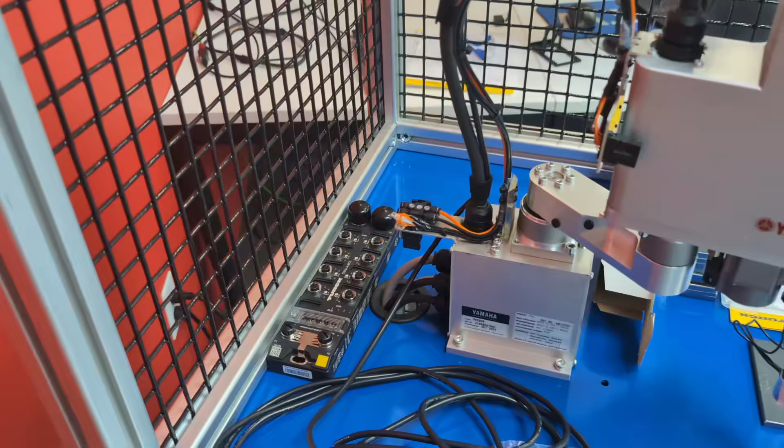So now I got to figure out how I'm going to get this mounted into the trainer so that people can see it, but it also doesn't constrain the operation of it, and hopefully the robot doesn't smash it. Looks like it'll just squeeze behind the hole that we use to run the cables down, which will be very convenient.

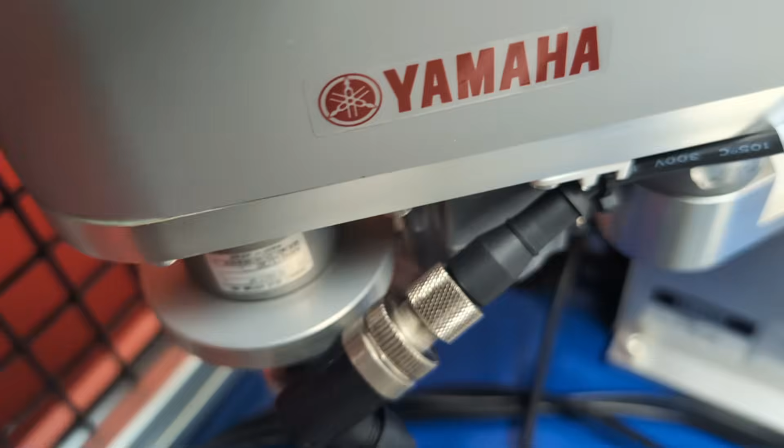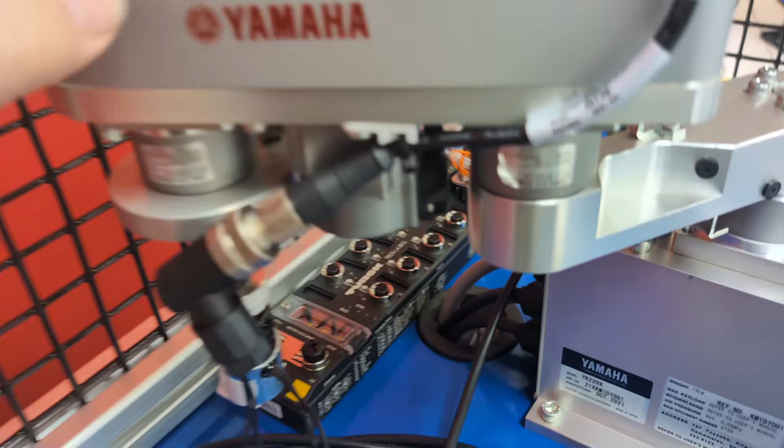And the robot, let's see, we're really close. Okay, I hit the hard stop there, so we could come around and hit that. In the end, I'm going to need to either make a soft limit or add a hard stop to the robot so it can only go there. Then if we come around the other way, knocking all my things out of the way, I had the same issue - it stops there.

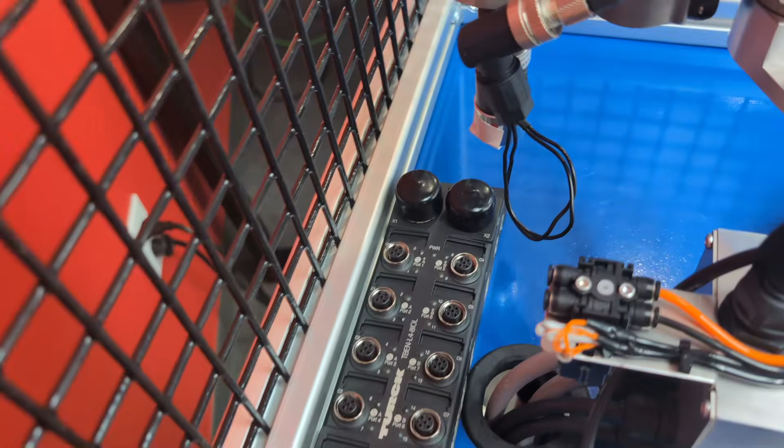Arguably could run into this one port right here, but this looks like the spot to put this, and this will let them see it and it'll be out of the way. Of course, there's always an obstacle to run through.

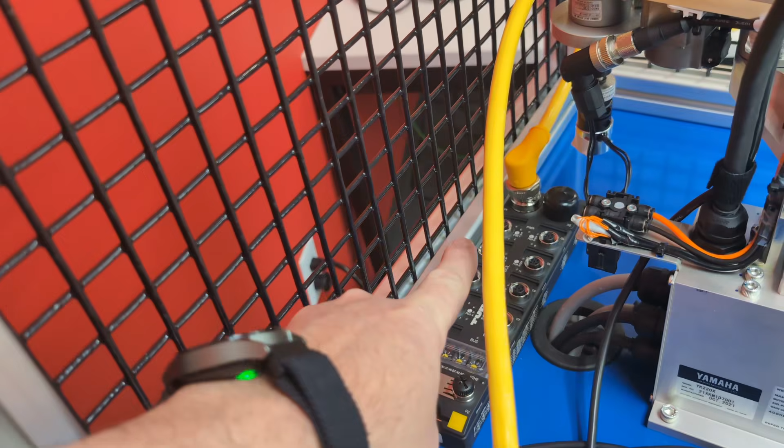A 90-degree connector is going to put my cable heading the wrong way because I need to end up here. So I don't know if I'll just loop around and drop in, or this may be a time for a connector that you put on the end of a cable, because those you could index.

If I get that cable running right through here, that'd be really good. Of course, that's going to get in the way of everything else. Always fun, always tough to figure out what order to do them in.

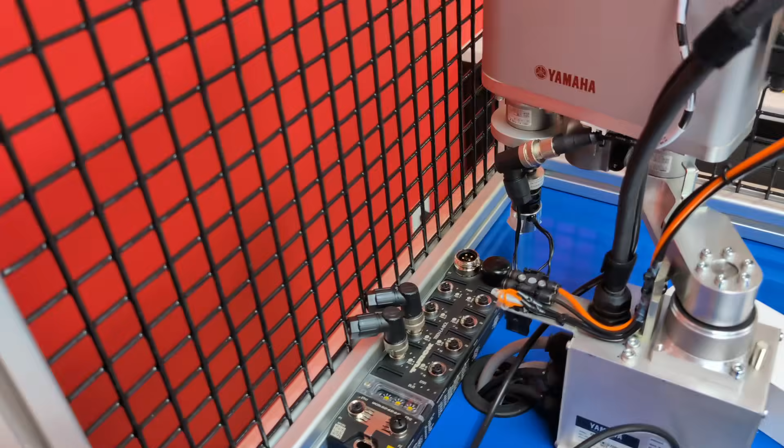I think I'm going to go this way with these. I'm going to try to leave these open for various accessories that someone may want to add. But from a cable layout, I'm mainly looking at these three right here. 1, 2, 3.

I think it looks nice. 1, 2, and we'll have a third one. Of course, that does put it on port 4, 3, and 2, which I know some of y'all are going to cringe at because you're going to think I need to start at 1, but no, it looks nicer.

First, in typical fashion, I need about a 2 meter Ethernet cable with the M12, and I have a 1 meter and a 10 meter.

First, just realizing these have the auxiliary outputs on them. Doesn't really make sense to tie up my inputs with them, so they really should go over here. So here you go, we're gonna move the cables around for another 20 minutes.

Of course, now I'm realizing if I put these over here, I can't get to these. Oh, wait a second, what if I just turn the whole block around? Yep, about 20 minutes later, to end up in the exact same situation.

But mainly now the ones with auxiliary outputs are kind of here where we can use them easier. These right here are definitely just inputs because they're going to these lights over here. So now we got to do some mapping.

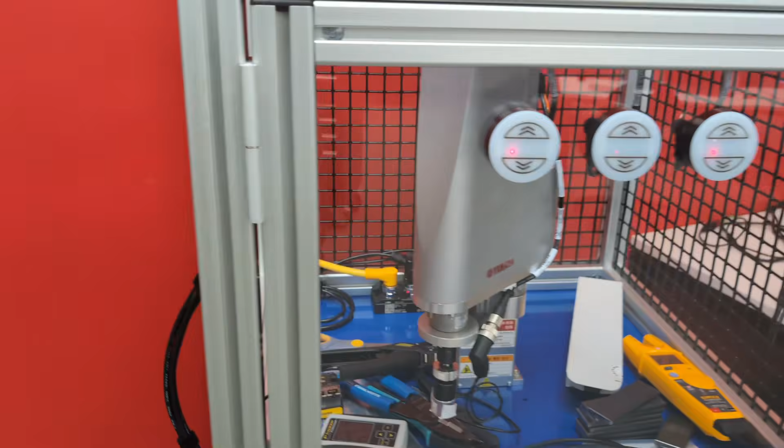You gotta love my expensive workbench. And this is where I really love this Turck module.

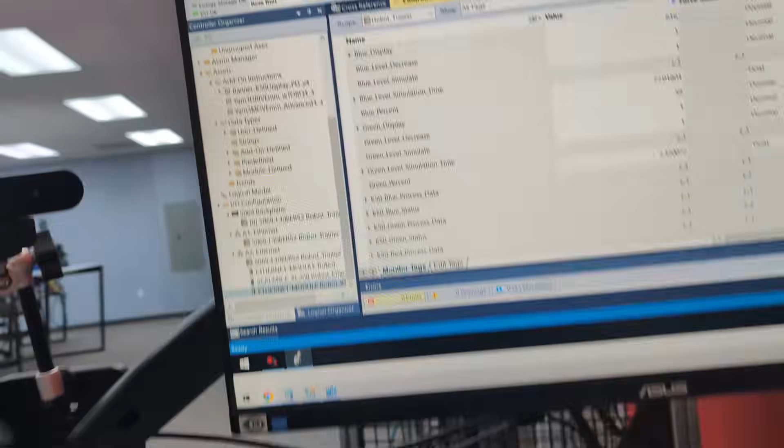As we go over here to documentation, first of all, we pulled out one of these FEN20s, stuck it back in, assigned the right IP address. This thing's ready to go. It uses the exact same configuration.

And I know I was using port 1, 2, 3, and 4 because this is only 4 ports. So if I go over here, we can get a documentation up here, and then we go to Ethernet IP map. And yeah, now we need to go figure out what we need to do.

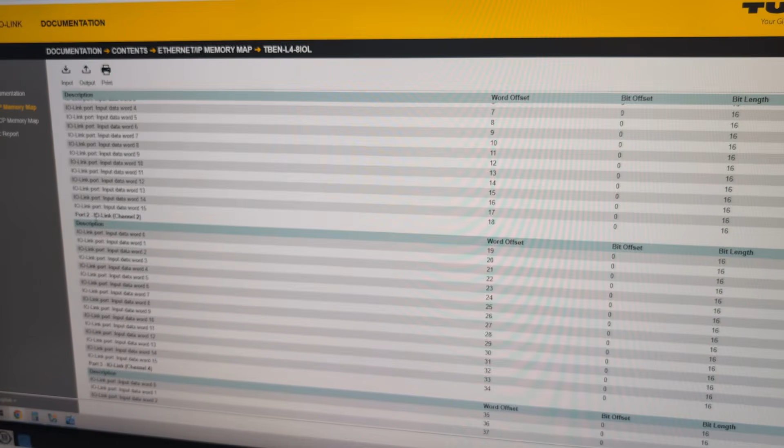So now I have what was port 1 outputs on port 8. So we'll scroll like crazy down to our output section.

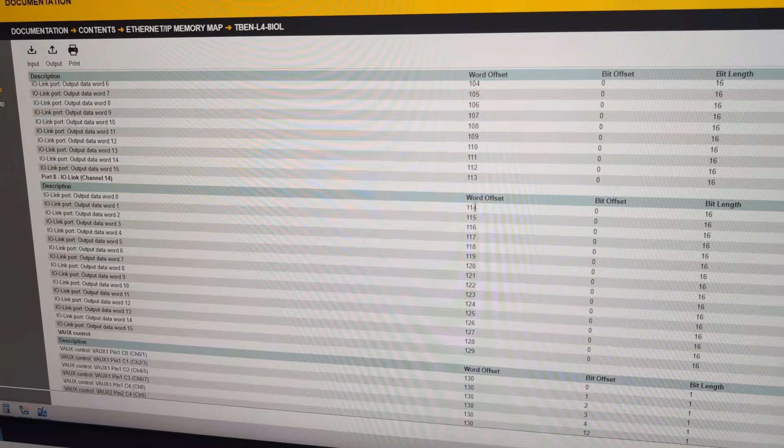So yeah, we were on word offset 2 for our outputs. And now we're going to be on word offset 114, and that should magically make that red light work.

And so now I'm going to right click that IO link module. We're going to cross-reference it.

First, you know, there's just something a lot of people don't know, because if you've ever been to a class, you know I don't like you scrolling a lot. It looks like there's nothing here, but we can hit that by tag.

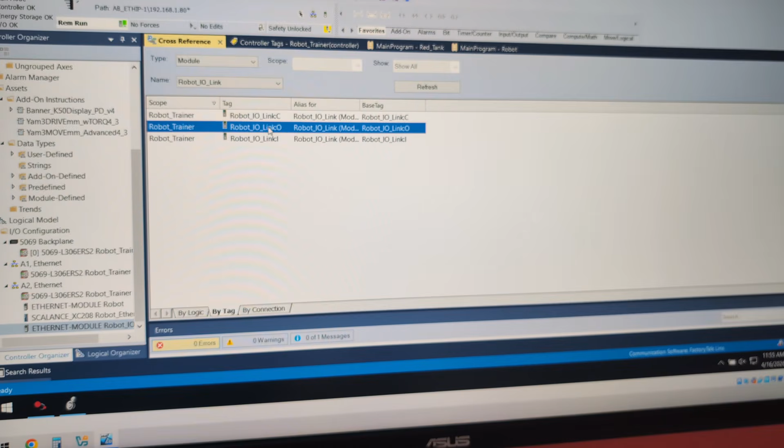And there's my outputs. And we're just going to go ahead and cross-reference this whole thing.

And, well, it's the red tank, I know that. Okay, and there's my 2.

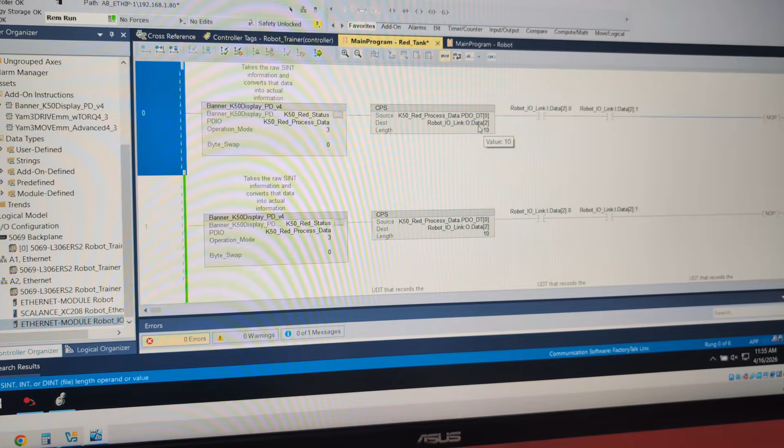So we'll start our rung edit here. We're going to change that 2 to a 114. Oops. Took out my little bracket thingamajigger.

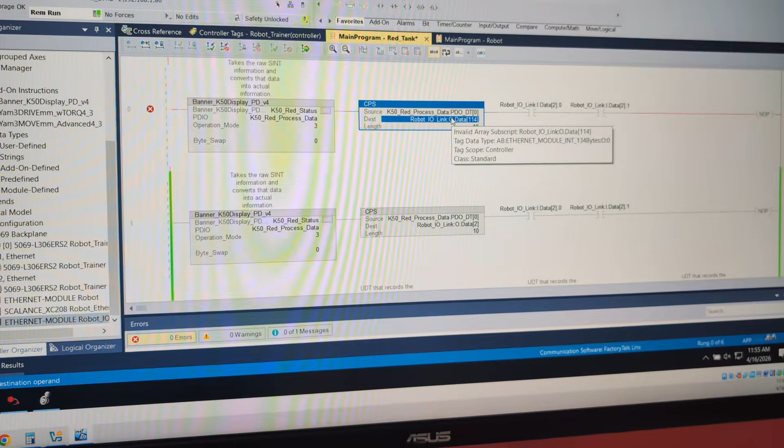Now, whoa, why don't we have happiness? Well, folks, we have a learning opportunity apparently. And of course the answer's right in front of my face.

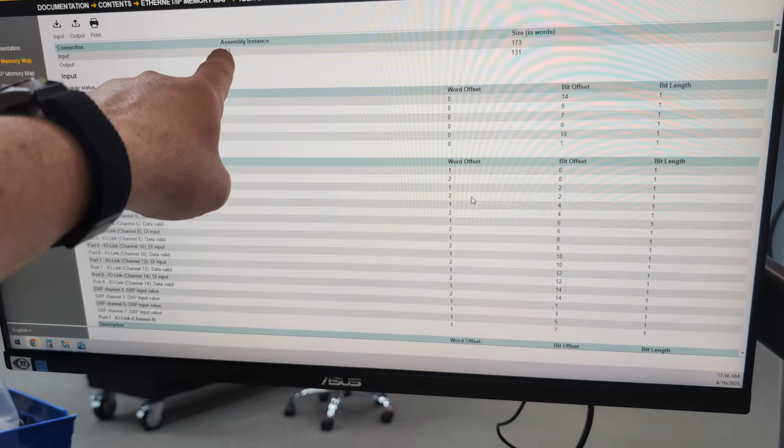I sat there and said the setup's the same, mainly the assembly instances are the same. But if you're using the 8-port module, our inputs need to be 173 and our outputs need to be 131. I don't have number 114 over here.

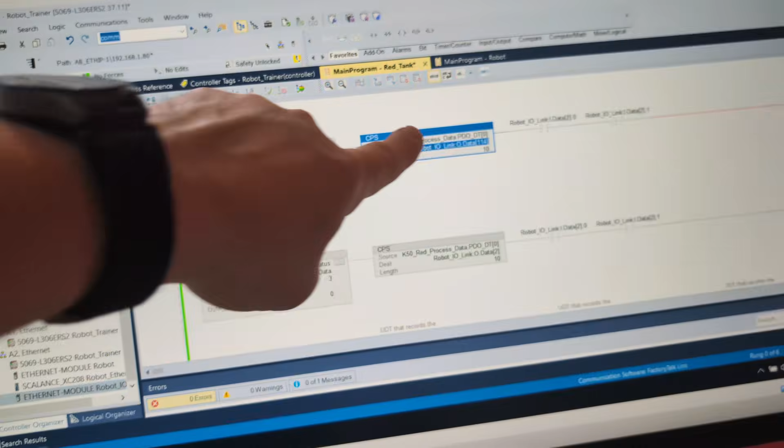So if I go over to the properties of the IO link module, yep, I'm too small over here. And of course I'm going to have to download to fix that. So we'll go ahead and save, because good grief, I did this earlier this week and forgot to save it and lost all my robot parameters.

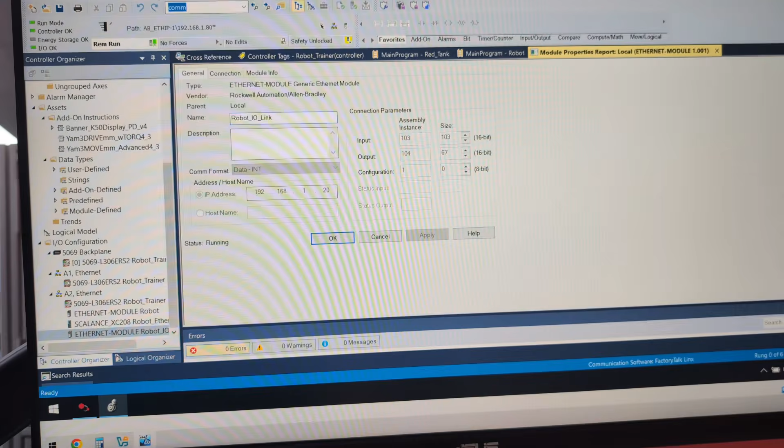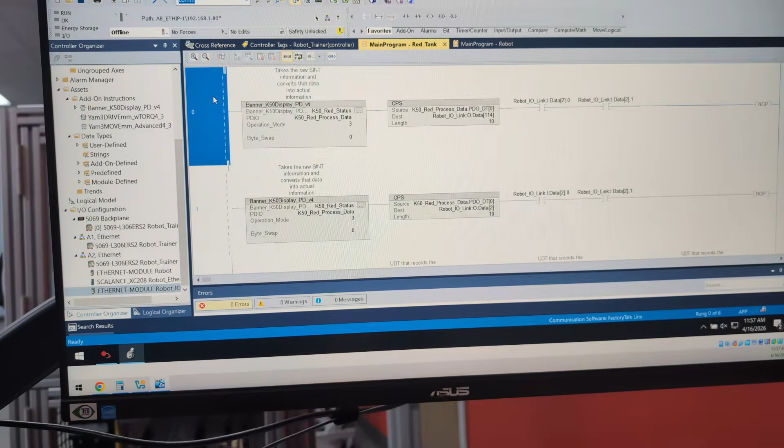Then we'll go to communications, go offline, and change that 103 size to 173. And we're going to change this 67 size to 131. We'll go ahead and press the OK key. It's going to make that happy. Very awesome. Can I go? Oh, well, I can accept that here and that'll be fine.

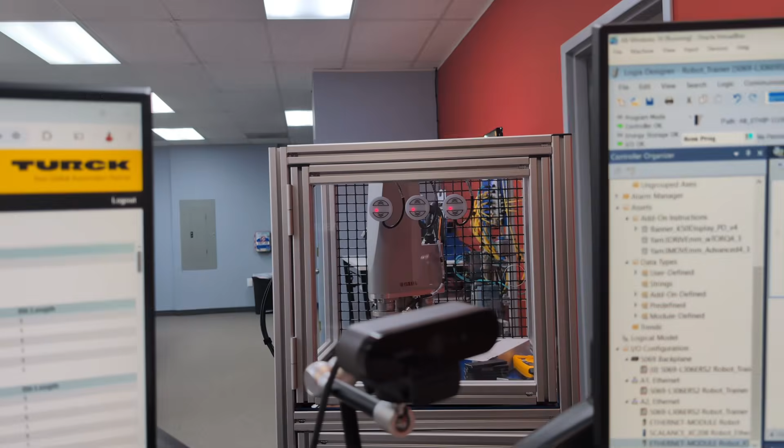Yeah, as soon as I download this, hopefully that'll fix my red light. So make sure it's my PLC, hit the download button. Then hopefully the moment I put this in run mode, that left-hand light starts working.

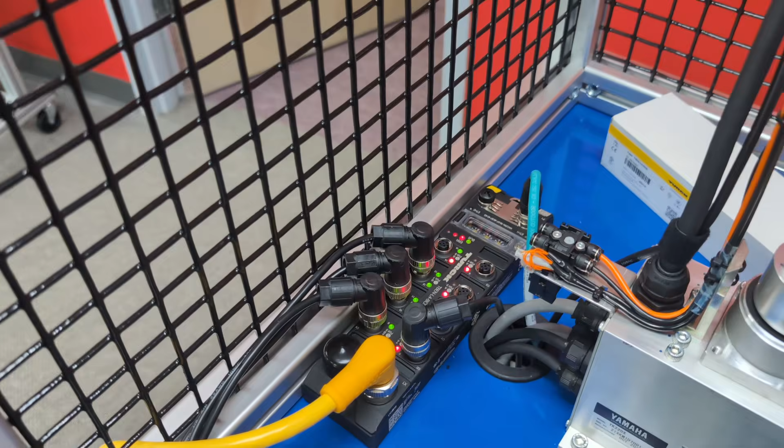Oh, don't you hate it when it doesn't work? Well, let's go figure out why. Yeah, that's because my counting abilities are not that great apparently today.

There's port 8, it has nothing connected to it. That would 100% explain why it's not working. The red one's port 5. Red, green, blue. So we need to go down and find where port 5 begins.

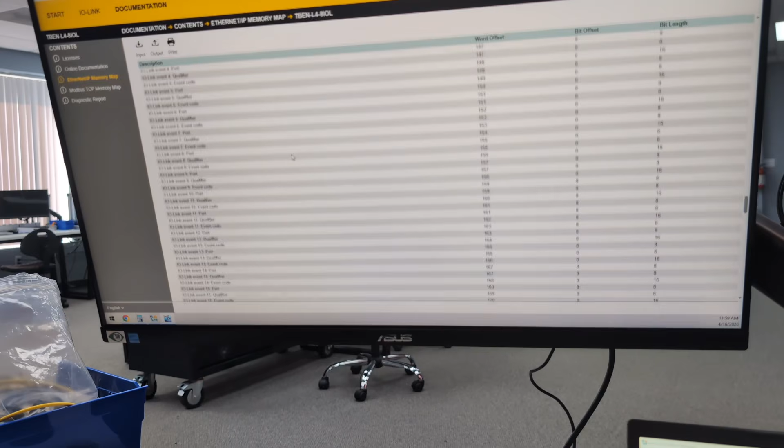Oops, that's the inputs. We want to go down to the outputs. They may be the same on this module, I'm not sure. But they made them down here in their own little area, so we're going to give them some attention. And port 5 begins at 66, not 114.

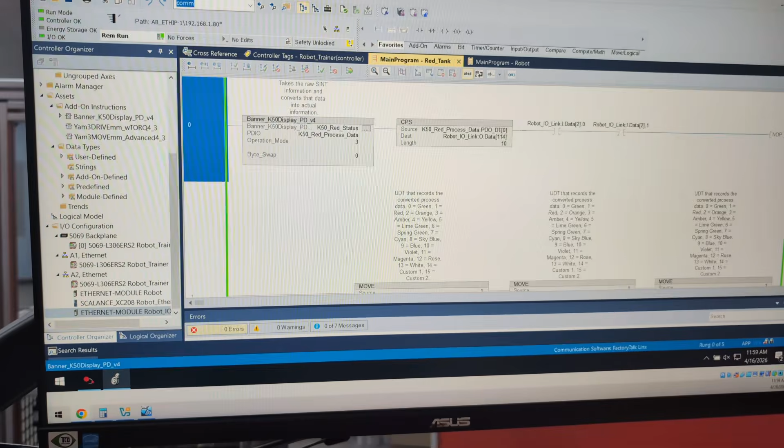So then we'll go over here. We'll start a rung edit. We're going to change you to 66. Oops, you need to change to also. Yes, you do. That's the input side of this.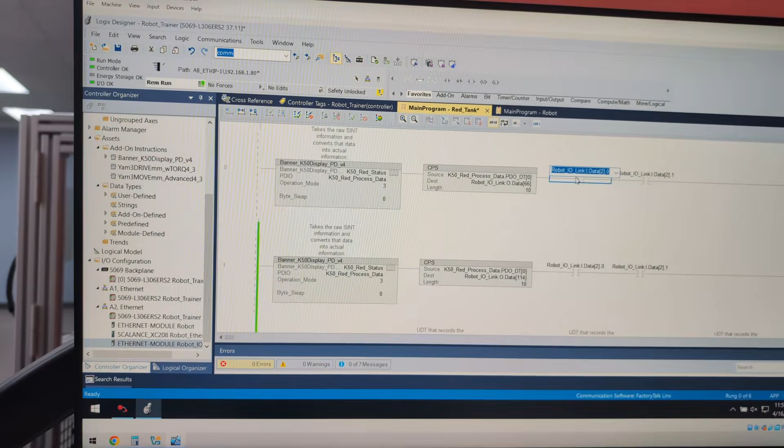Well, while we're here, we ought to do it, because if you didn't know it—yeah, when I get up I'll point it out better—these are really cool lights from Banner. They give us a display, a light color, and they also have up and down arrows.

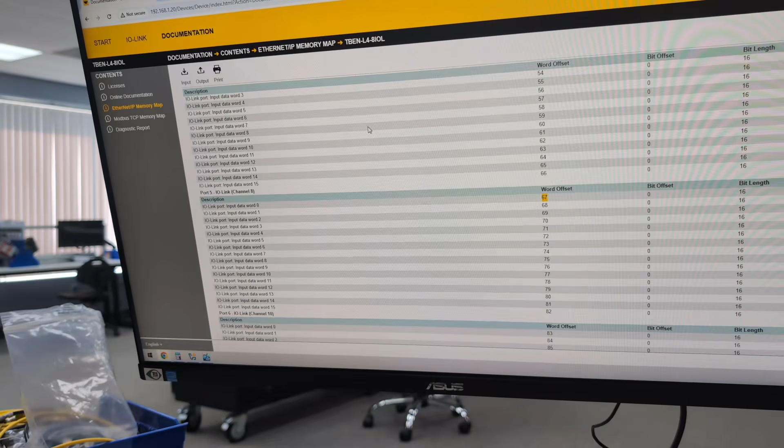So let's see what port 5 inputs are. Port 5 inputs, ooh, it started at 67. I wonder if the other one did the same way. Well, I'm gonna guess it's 67 instead.

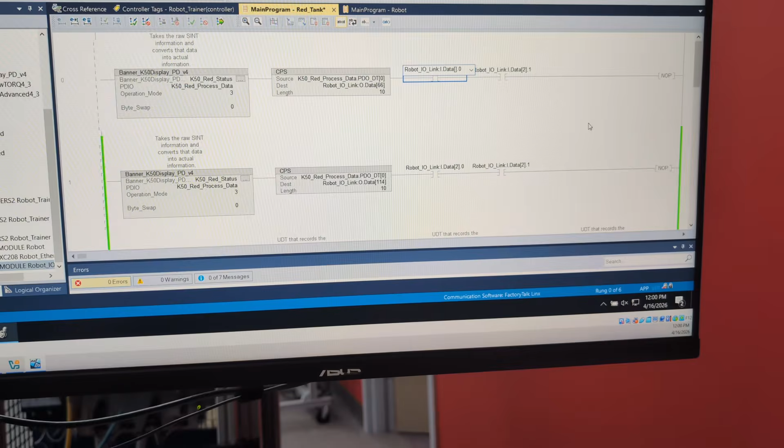So we'll go ahead and just guess, because that gets us somewhere almost none of the time. 67, 67. And now, when I press that magic finalize button, there we go. Okay, I've got a byte swap issue.

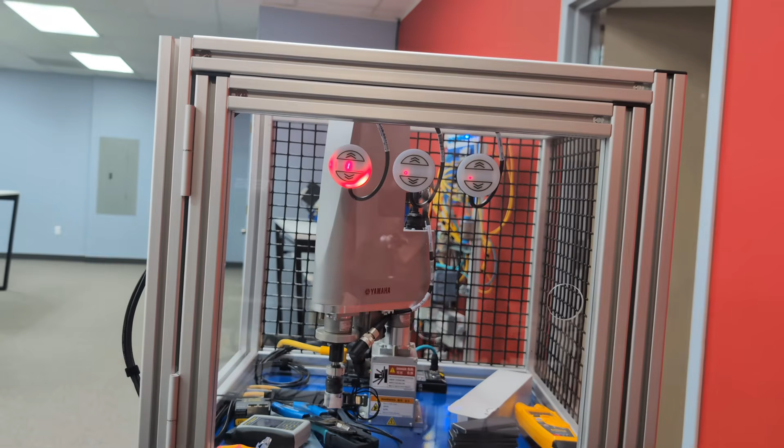I can see it. This is supposed to be doing like a level simulating up and down. You kind of see it's kind of going crooked and meandering right now. That is not good. You really can't see that either, but yeah, look there—that should be a nice tank level, and it kind of looks like it's going a little crazy.

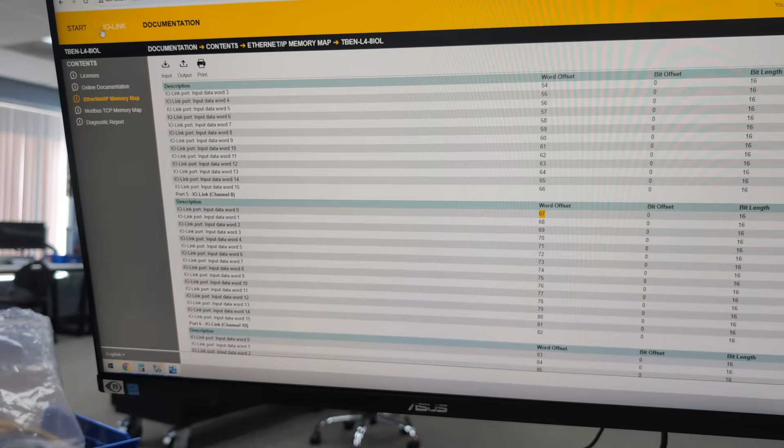So we're going to go over here to our documentation. Actually, no, we're going to go to the start. We're going to go down to here to their output section, and we're going to be on port 5. That is not where I wanted to go. I wanted to go to the parameters here, then port 5, and I want direct processing.

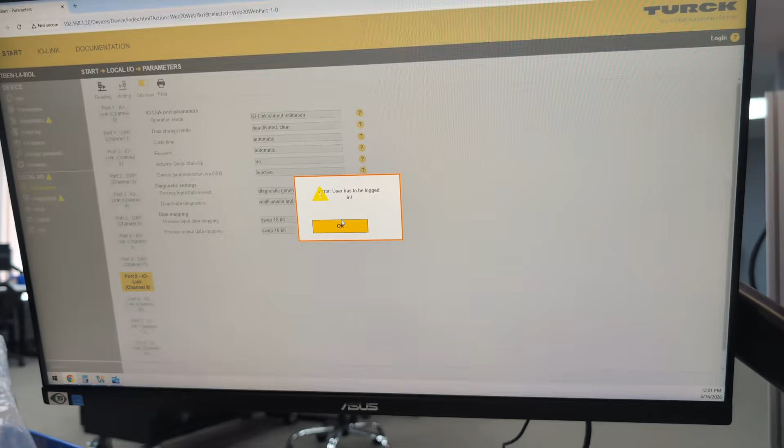And the moment I hit that write button, it says error, user has to be logged in. Well, I am logged in. Oh, no, I'm not—I powered the darn machine off.

So now we'll make our outputs direct. And when I hit that write button, there we go. That makes that really nice and even. Even though you can't read it quite from here, you can see that level slowly going down.

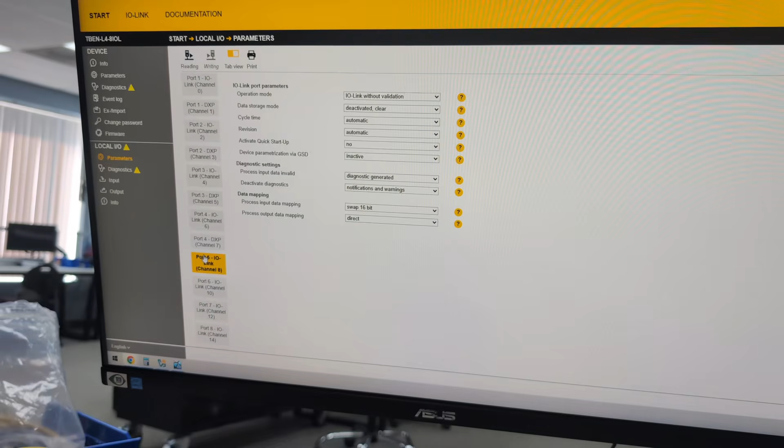So we'll need the exact same thing on ports—oh man, that's port 5, 6, and 7. Port 6, we'll make the outputs direct. Port 7, we'll make the outputs direct. Oh, I didn't hit the write button on that. I wonder if—oh yeah, I did them all.

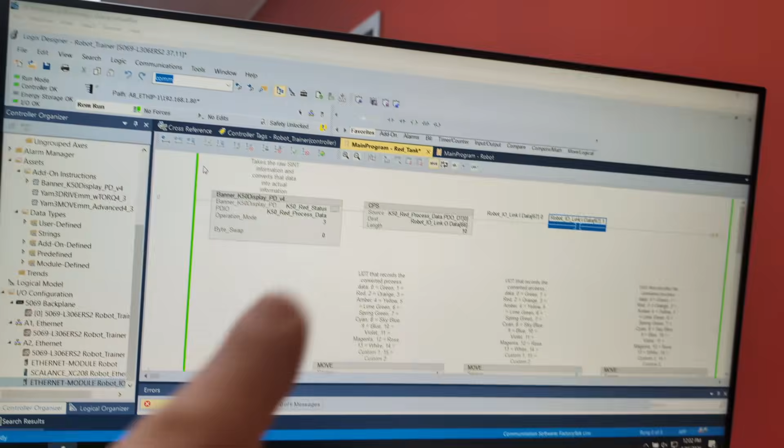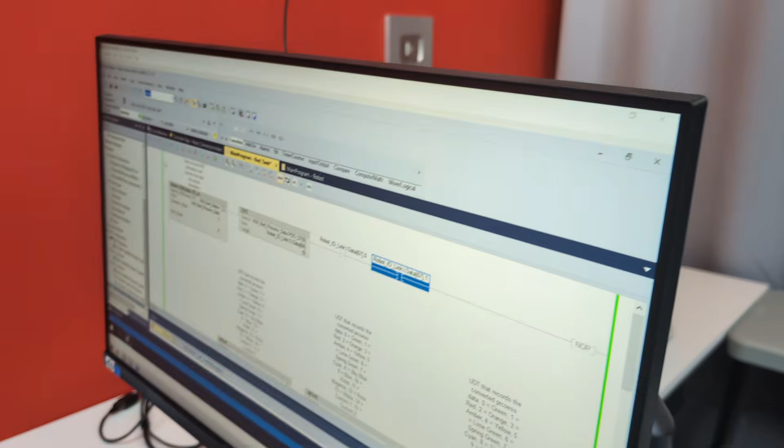So the next question is, did I get these two inputs right? I can't reach it—that's a good thing my screen swivels. But yeah, so it has a button on the top, a button on the bottom, and I press the top. There goes that one. I press the bottom, there goes that one.

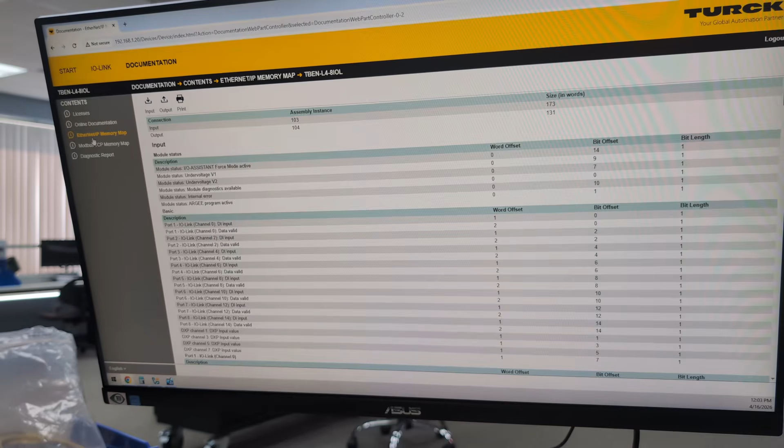Now we need to go find our port 6 section. So that's going to be our green. So we got our outputs.

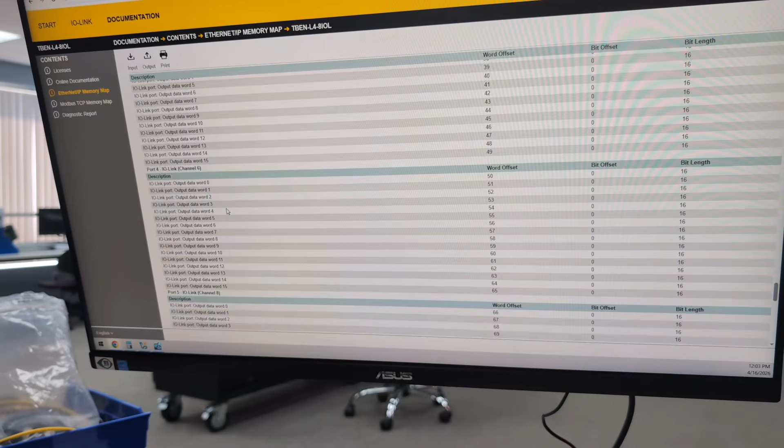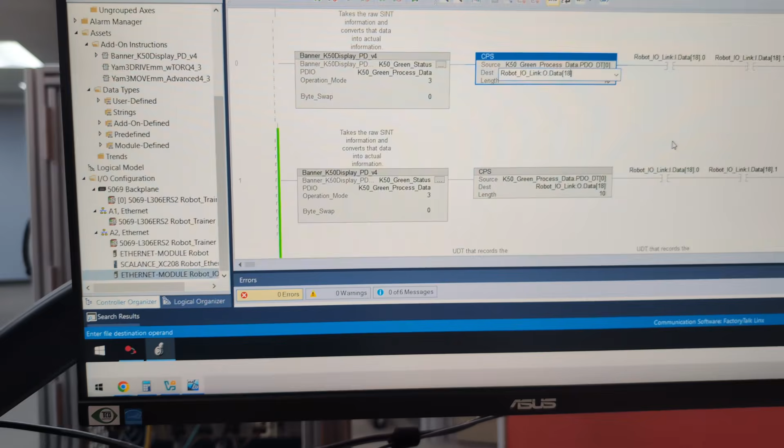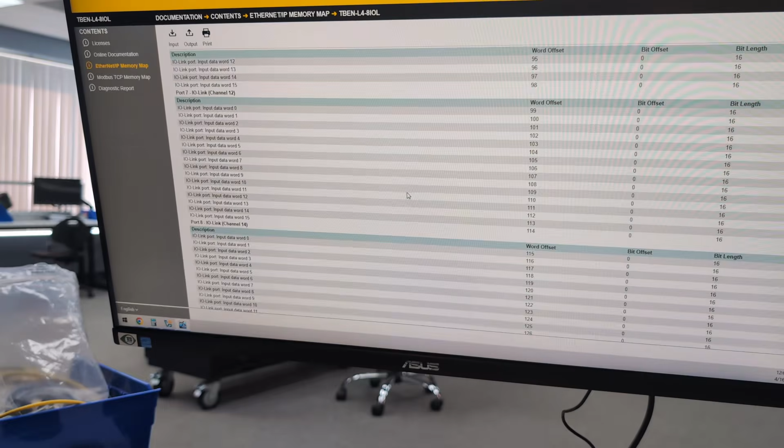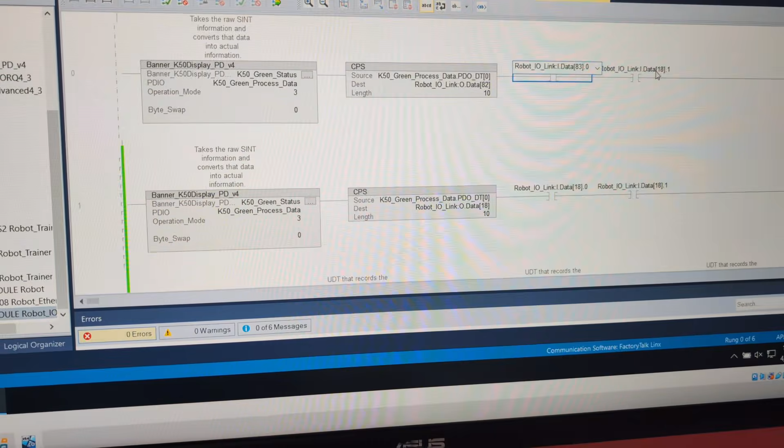And I wildly guess that means this is going to be 83, but let's make sure that they're following that same pattern. So go up to port 6, 83. So we'll change this to 83. And we'll change this to 83. And then while we're at it, we might as well go find port 7 outputs while I'm at it.

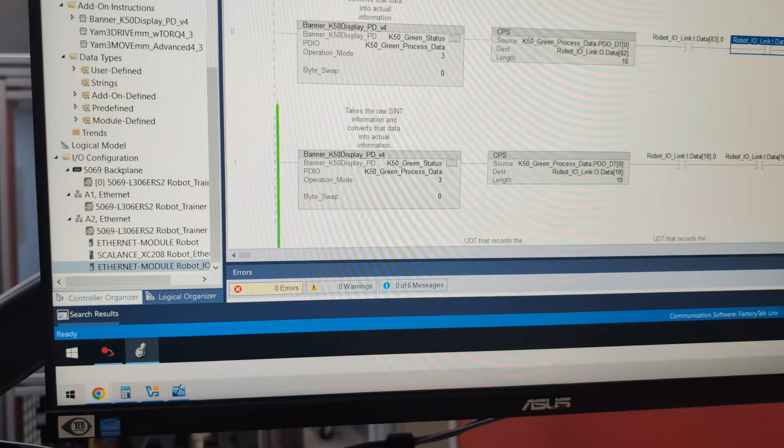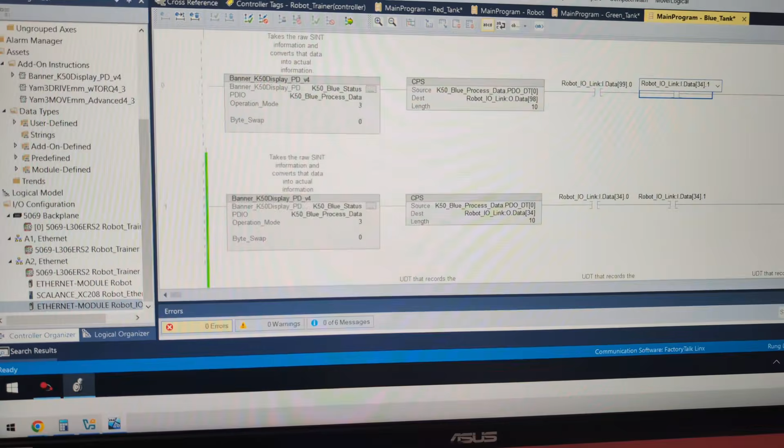I see it's 99 here, so it's probably 98 on the outputs. It is. So RGB, blue tank. I'll start a rung at it there. We're gonna make that 98. And we'll make this 99. And we'll make this one 99. Oh, that was 91, 99.

And yeah, when I hit that finalize button, all these magically should start working. Look at there. Even in the right order, it looks like the tanks are going up and down.

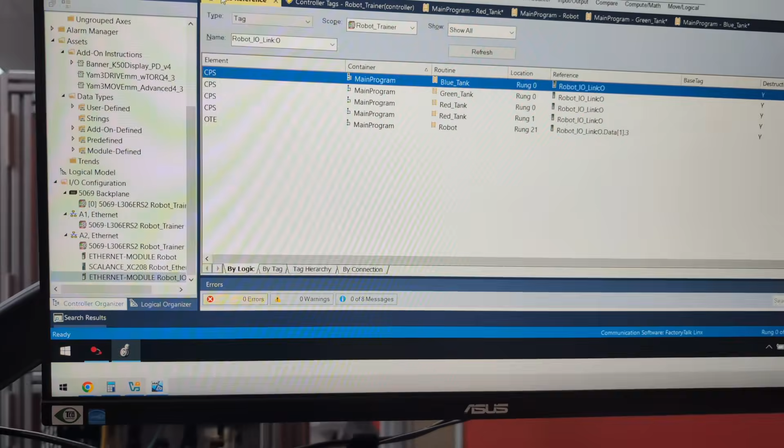We did have one more over here. What was the other one? Oh, this is our magnet. Oh yeah, that's gonna be important. So my magnet, I put on port, I'm not even gonna guess. I put my magnet on port 1. So now we need the output for port 1, hopefully to fire our electromagnet here.

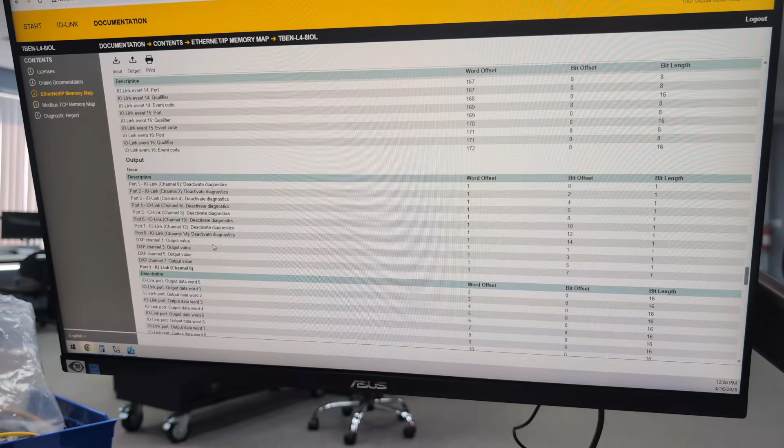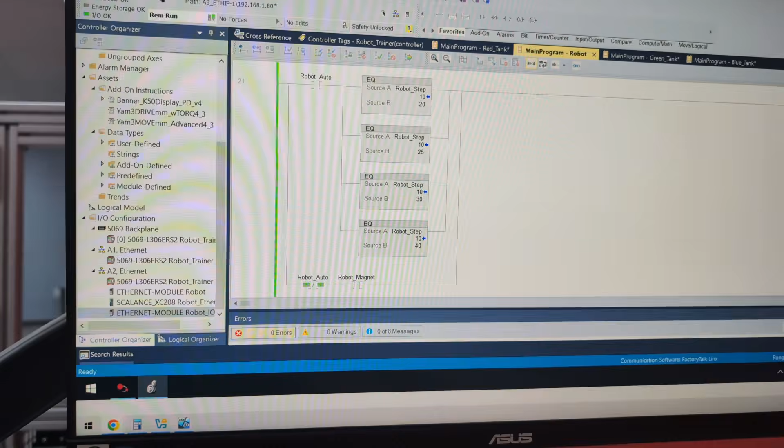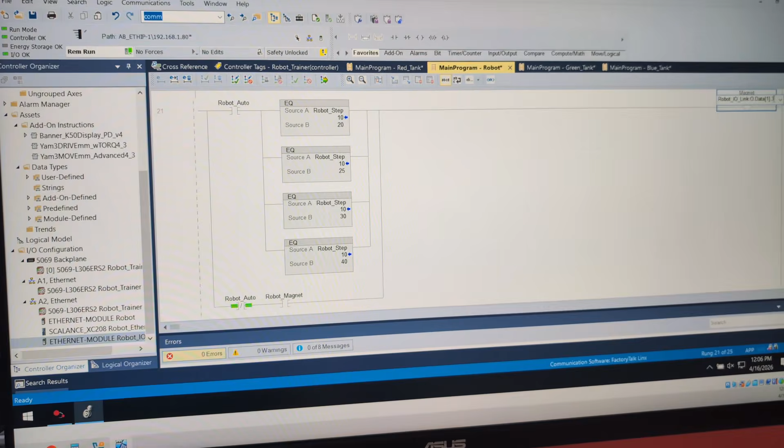So those are in their own little world right here. DXP channel 1, that's word 1, bit 1. So we'll go over here, and that means this needs changed to word, almost right, word 1, bit, is that right? Somehow I think I got something wrong on this one.

Let's go ahead and finalize that. Also, I should have grabbed that magnet description before I did that, because now I'm gonna take the magnet somewhere else. But yeah, I need to fix that right now. Let's go ahead and monitor that and grab that magnet out of this one and put it there.

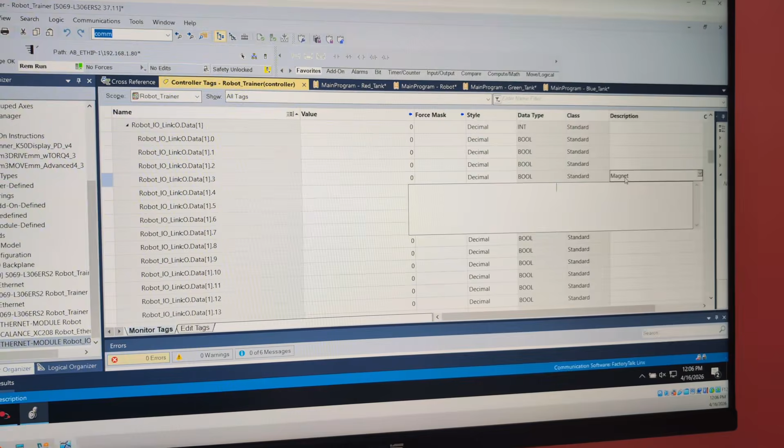And then we'll go back over to our robot program. Okay, so now this green should turn on the outputs. I press the up. Okay, it is.

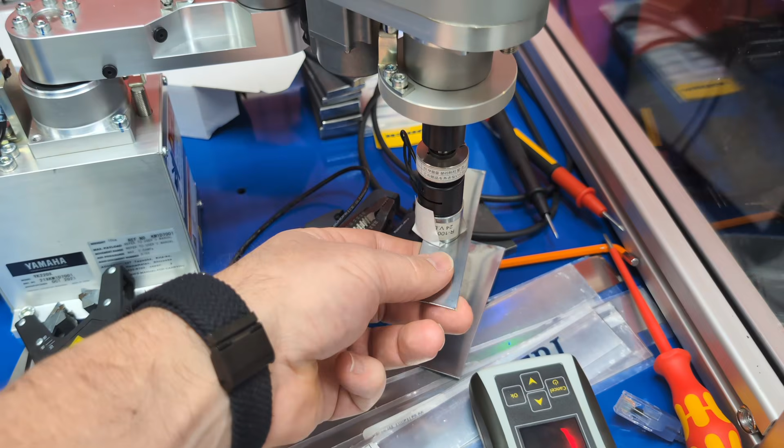Now does it actually work? Ooh, look at that. Oh, you didn't see it. Let me do that again. Look at that. Whoa. We were getting really good at picking up parts. We're still struggling a little bit with dropping them.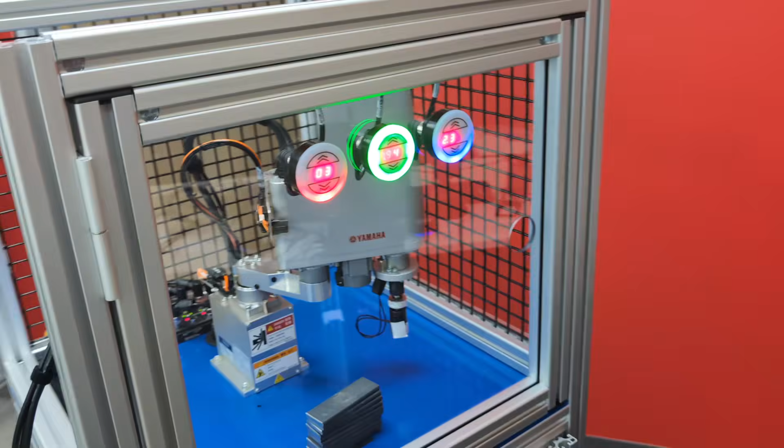All right, I guess I need to clean my pig pen up and actually see if this will run now. If I got everything mapped right, I should be able to press the top red and start this. And we hope it drops a part.

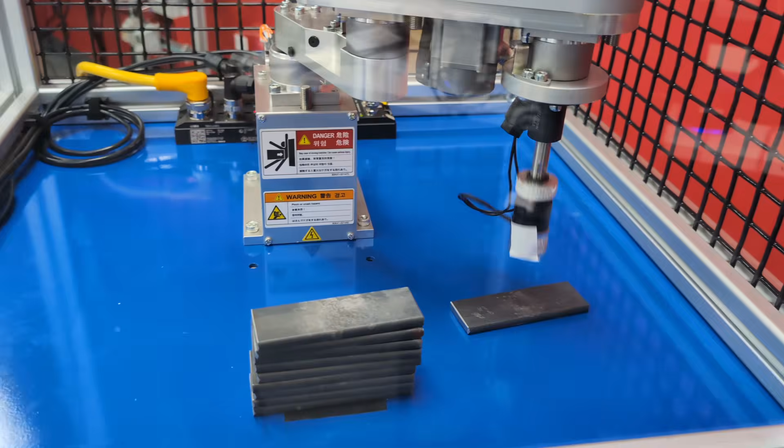Yeah, we're getting there. Got this fine modification. We've been playing with all different types of thicknesses of stuff, but this is well engineered here. We got a piece of white tape stretched a little thin to get it to just the right thickness to drop a part. But I think we might have a permanent solution hopefully soon.

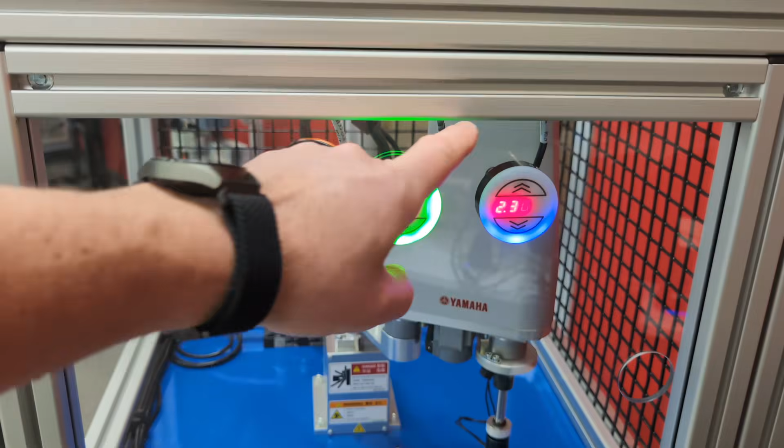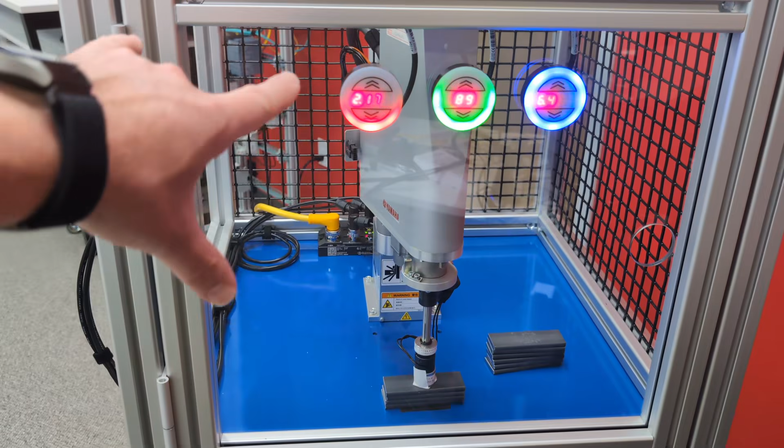Right now, and probably here's where I got to start building out some exercise on this. This is the anodizing tank that you saw in some of our earlier videos, what we actually go through in our in-person Ignition SCADA class. But a lot of y'all had a really good comment. I had them down here, so I was trying to make it like a tank. You're like, stick those things up there out of the way.

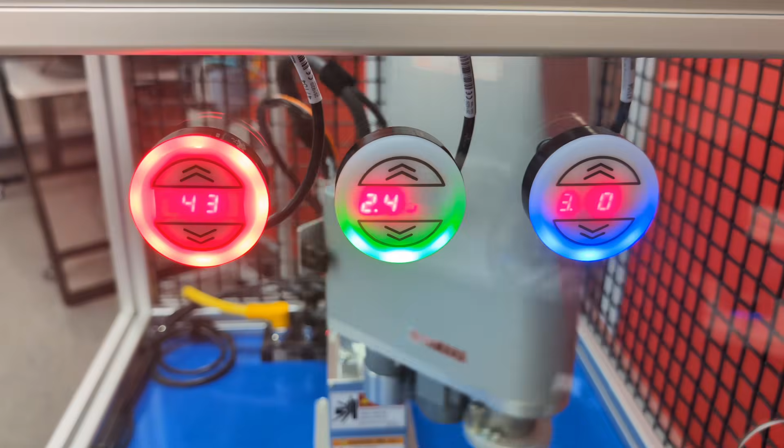And yeah, so they still will work as the tanks. And I really wish those displays worked better with my phone. But they also could be indicators. So I need to work on making them some cool indicators for various projects. I'll say it looks like I do need a sensor, or I could do a simple part counter, because right now it has no way of knowing that it doesn't have a part there. Of course, it has a black mark, so we could use a basic color sensor. Black mark helps me figure out where to put them at.

But we go ahead and press the bottom red, and that stops it.